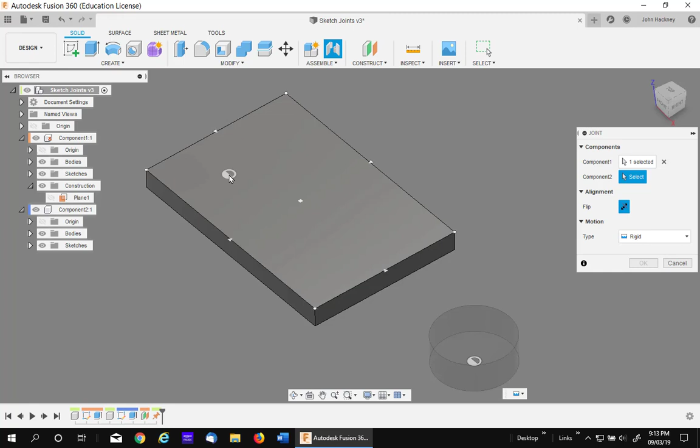So if I did a joint at this point between the center point, I'll use rigid. You see that my only options are the centers, midpoints of each edge, or the corners. If I click, it's going to go to one of them. It doesn't matter what I do. So here's the option you can do. We can use a sketch to give us a key point.

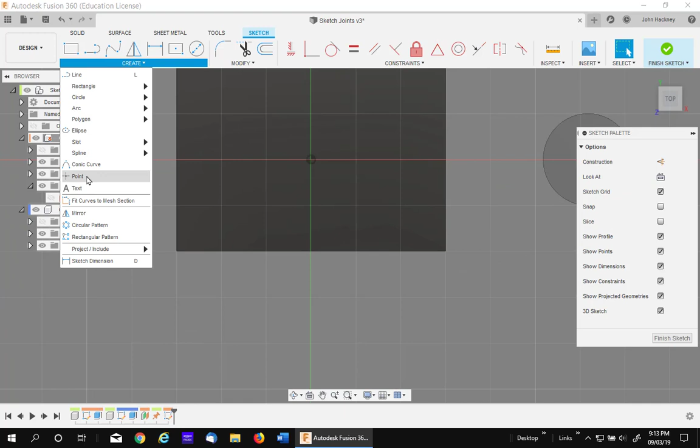I'll activate this component, and then I'll do a sketch on this surface. I'm going to just use a point, and I'm not going to constrain it. I'm just going to set it on this surface. So the point is sitting on that surface. Go back to my assembly, make it active, and now joints are easy between the center of this puck and this point, and it moves right there.

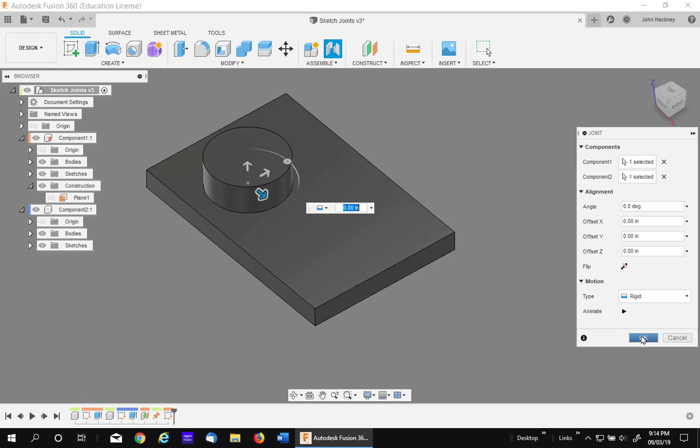So that's one way of making a point. Now that point is not constrained, so you can drag it around to your heart's content, even off the part, because it is just a surface.

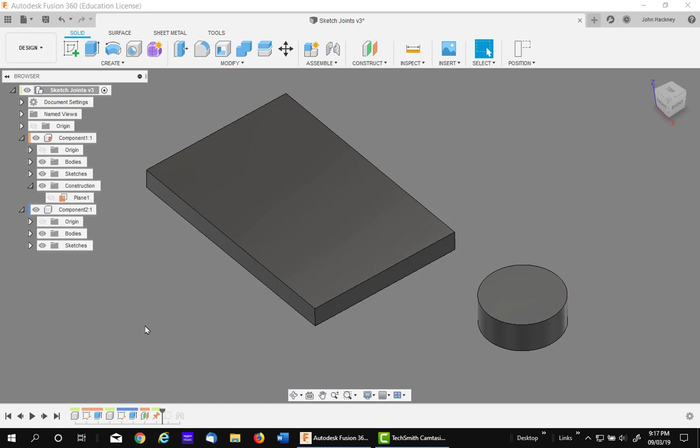This same technique can be used to constrain or add joints between components and work planes. We already know that work planes cannot be used with joints, but if you add a sketch to them, they can be. So what I've done is I activated this component and I put a work plane up above it. I'm going to remain active and I'm going to place a sketch on that plane.

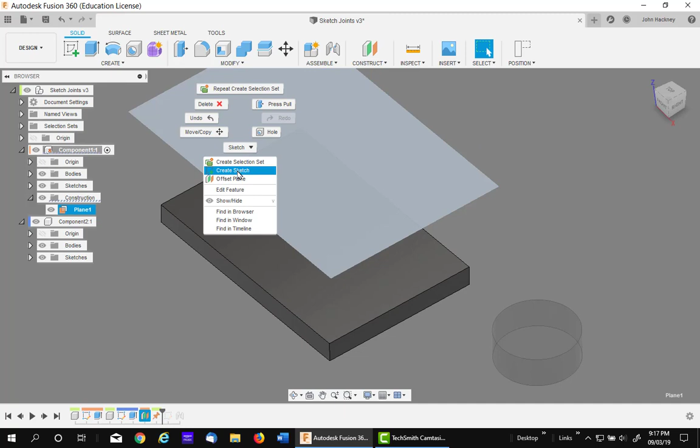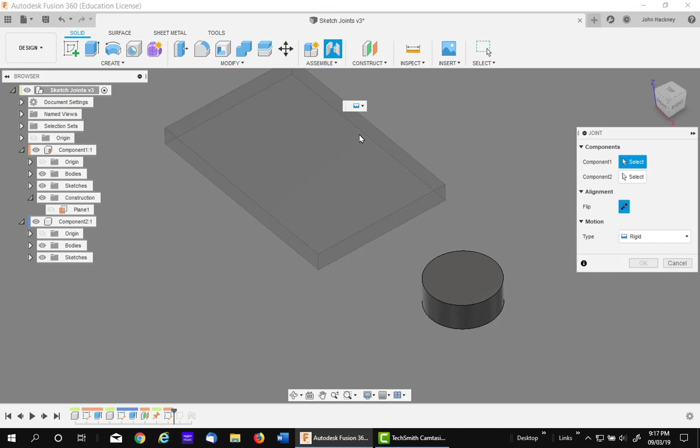So now I'll go ahead and, no, it didn't take, create a sketch, there we go. And I'll put a work point, again, anywhere I want. I can constrain this if I like, but I'm not going to. Now return to the top level, and that point can be used with joints. So if I go to joint, again rigid, from the center of that to that work point in space.

Actually, I'm now constraining to a work plane, that construction plane right there. Kind of cool. So you can turn a construction plane at any angle or any work plane into a component that you can put a joint to. Since that point was not constrained, I can drag it around just like before.

I hope this helped you maybe make some new designs and new features that you maybe thought once were not possible.